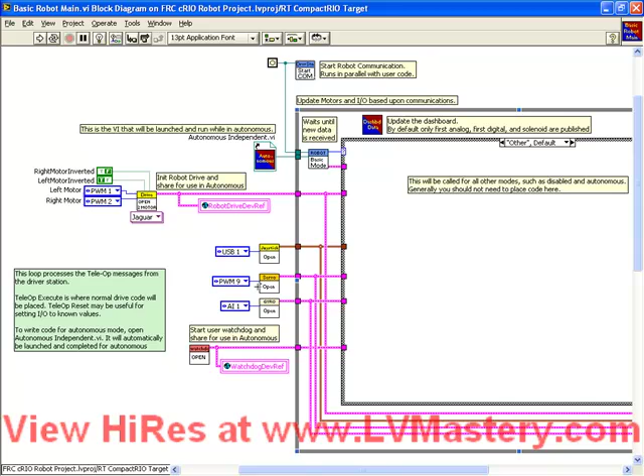You need to do that outside the while loop on the left hand side here, and then you wire into the basic robot main. We've done that here with both the servo and the gyro. And if we follow these wires around, we've also made copies of the servo close and gyro close, and we've wired those reference wires into them.

So when we take a look at the teleop execute case, we see that we've got the gyro get angle, and if we turn on our context help, we see that that returns either the angle or the angular rate from the gyro. And we've got the servo set angle, which is going to allow us to change the angle of a particular servo motor.

So this functionality of this code is really quite simple and frankly entirely useless, but it's good for a demonstration of how we can connect a sensor up to an output.

At any rate, we wanted to talk more in this video about the autonomous mode than the teleop. If we take a look here, we've got this block called the basic get mode, and this is a VI which is provided in the WPI library, and it's something which we should not modify at all.

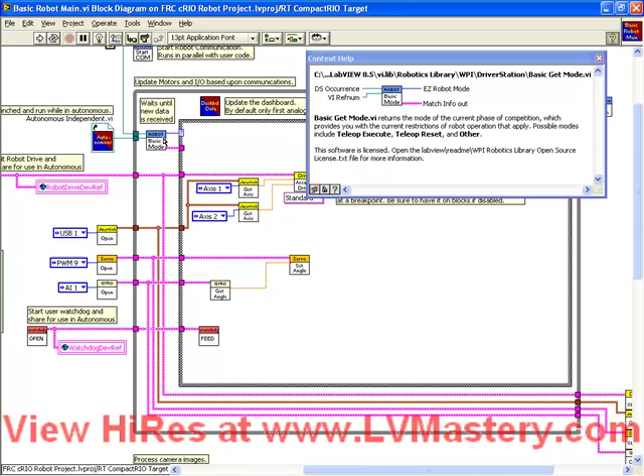Essentially what it does is it communicates with the driver station and finds out what mode the robot's in, and it spits out a value which is then used by this case structure to decide how the basic robot main should function.

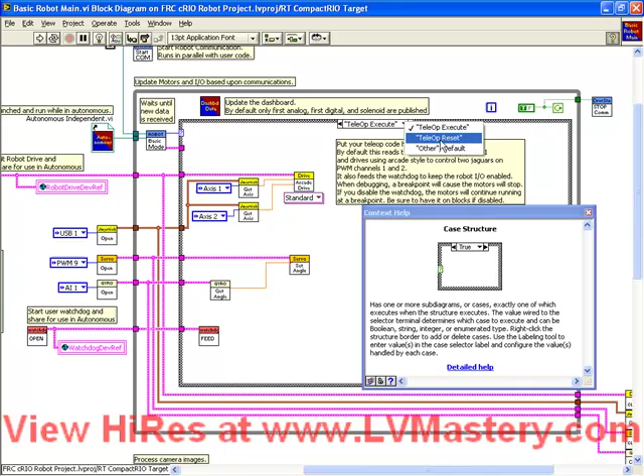So if we pull down the selector of this case structure, we see that we've got the teleop execute case, we've got teleop reset, and the code sitting here will be executed whenever the teleop mode is reset. And we've got other.

So other here is a completely blank case. As it says here, this will be called for all other modes, such as disabled or autonomous. Generally, you should not need to place any code here. So here we've got a blank case for autonomous mode, and the instructions tell us not to put any code here. So it leads to the natural question of, well, how do I write my autonomous code?

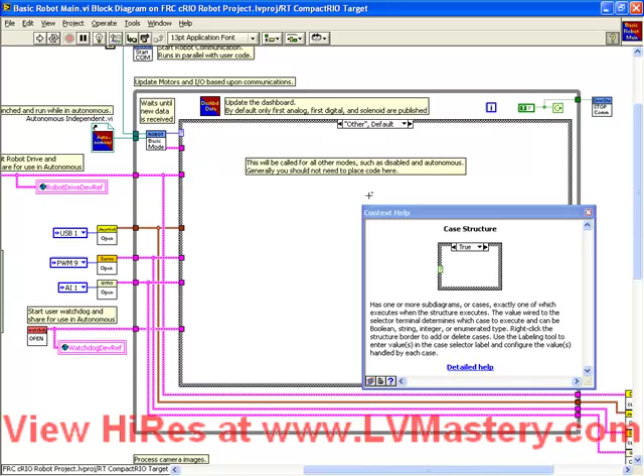Where does it go? The answer to that is actually sitting here. This is a reference to a VI called Autonomous Independent. So what does that mean, that it is a reference? It's not the VI itself.

Remember what we learned about the data flow methodology within LabVIEW. If this was a VI sitting here, it has an output wire connecting to the input of this while loop. In other words, this while loop wouldn't run until this Autonomous Independent VI finished, and that obviously doesn't make any sense for our application. So it is a VI reference.

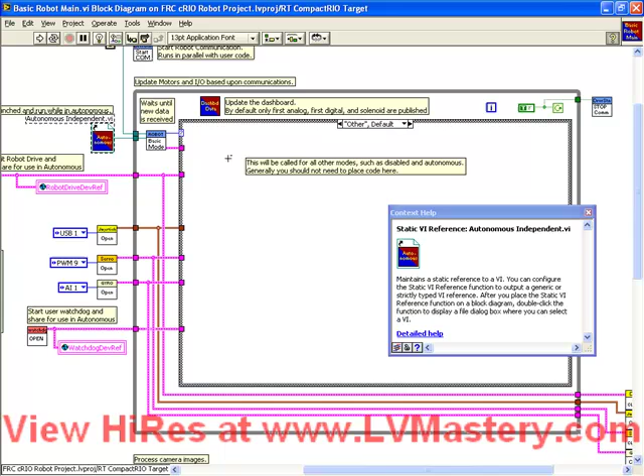In other words, it is a way to tell the framework of the code where our Autonomous Independent VI is. And what happens is, behind the scenes, the framework is taking care of launching and shutting down our autonomous code. That's why it's not sitting here. It's not sitting in the teleop.

Actually, if you look very carefully down into it, and we won't go through that at this stage, I think it's beyond the scope of this video, you're going to find where it automatically launches and automatically shuts down that Autonomous Independent VI.

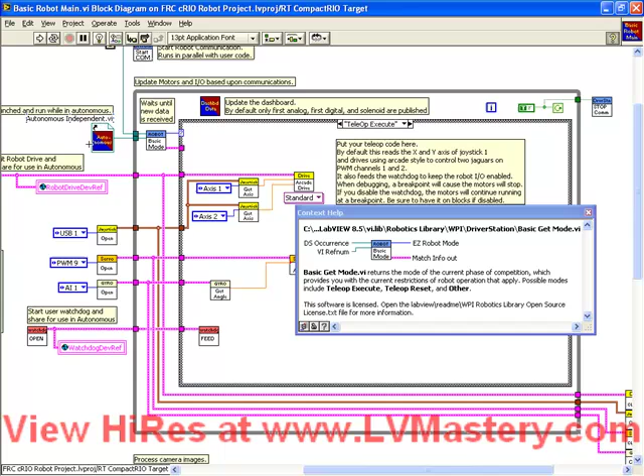It is enough for us to know at this stage that if we want an autonomous mode, we've got to put our code into this Autonomous Independent VI. We don't have to worry about when it gets launched and when it gets shut down.

So how do we get at this VI? This isn't the VI, it's just a reference. Well, it turns out because it is a reference, if we double click on it, it will open the Autonomous Independent VI. Alternately, if we were to go to our project window, we would see sitting here in the root of our project is the Autonomous Independent VI.

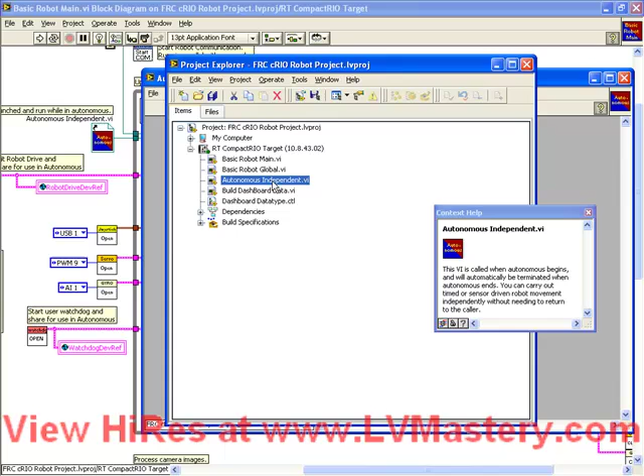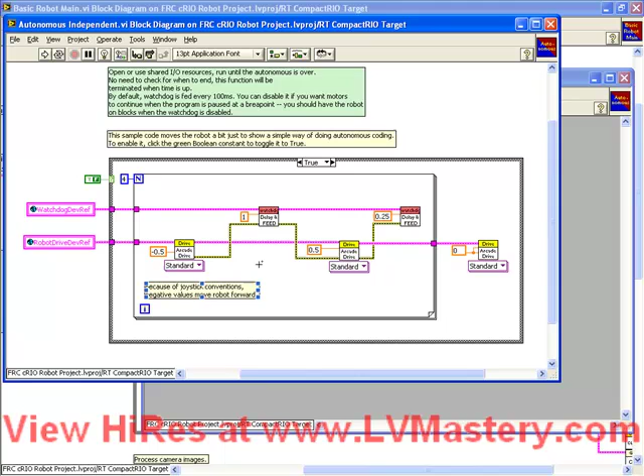And then it repeats that 4 times inside a while loop. So if we activate this autonomous mode, our robot is going to move in one direction at half speed for 1 second, in the opposite direction at half speed for a quarter second, and then it's going to repeat that a total of 4 times. And at the end, it's going to set the speed to 0.

So if you want to try this out, all you need to do is flick this Boolean constant to be true, and then when you run your robot next time and flick it into autonomous mode, it's going to drive. So be very careful before you do that.

Before you click run, make sure that the robot is up on blocks, or it's not going to run into a wall or do anything crazy. Don't let your mechanical team find out that the programming team broke it running some sample code. That'd be really quite silly.

So what I want to talk about now is how we can make modifications to this to suit our own purposes. Obviously, this autonomous code is not going to work to allow us to win any points in competition. So we're going to need to change this code to do what we need it to.

In this example, we're going to take the servo motor, which we've activated in our basic robot main VI. We want to control it in autonomous mode. I think what we'll do is turn it to one extreme, let it sit there for 5 seconds, then turn to the other extreme and sit there for 5 seconds, and just repeat that continuously.

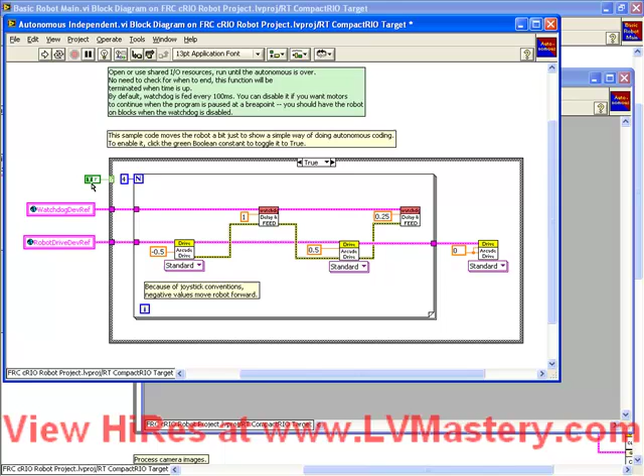So let's take a second now and look at what we need to do to achieve that. Let's go back to our robot main VI. We have a servo set angle VI, which makes it very easy, and if we activate our context help, we see all that we have to wire into that is a number which represents the angle in degrees. So we know how to do this.

We can put in a servo command, which is going to send it to one extreme. Then we can use a delay block, and then we can put it to the other extreme. But before we can do that, we have to notice that when we wire up the servo set angle, we need not only to set its angle, but we need to tell it which servo we care about. We need to do that by wiring up a servo ref.

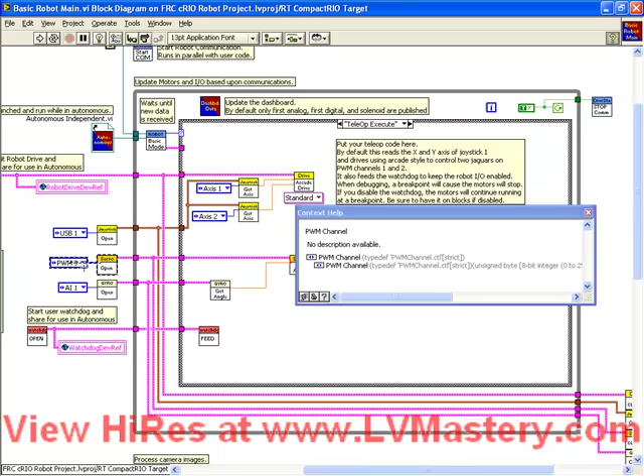So here in our basic robot main VI, we opened up a servo. We opened up the one attached to PWM9. So what we need to do to be able to talk to that servo in autonomous mode is to be able to access that reference. And when I talk about that reference, I'm referring to this wire.

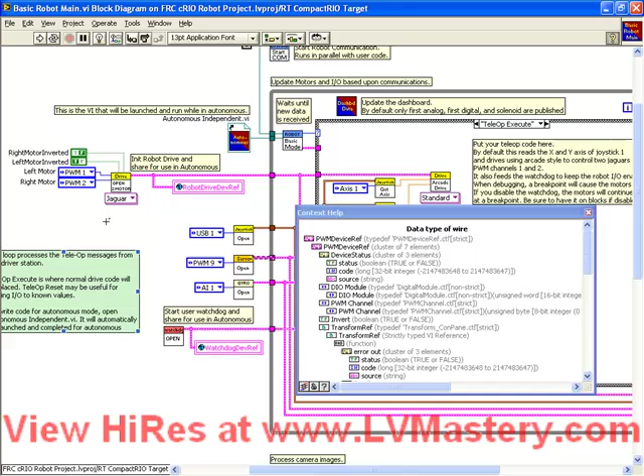So before we get to the answer on how to do that, let's just take a quick look a little further to the left, because we noticed that that autonomous mode was talking to our motor drives. Let's just return to that to take a look at it. We see here we are talking to the robot drive.

And where is that wire actually coming from? Well, we have this guy here. This is actually a global variable. And what global variables do is they allow you to make data available anywhere in your LabVIEW program. Naturally, this is how we're going to make the servo reference available.

So we see we have 2 global variables here, one for the Watchdog and one for the robot drive. And we can see in both of these cases, these global variables are acting as outputs. In other words, the data is coming out of those global variables and then being used by our autonomous VI.

If we return to the basic robot main, we see here that the reference that we opened to our 2 motors is being fed into the main while loop and being used by our teleop mode, but it's also being fed into this copy of our global variable. And the same is true for the Watchdog. We open up a Watchdog reference here, and we put that reference into the global variable.

So what we need to do in order to make our servo available in our autonomous mode is to create a global variable for it. And there's a couple different ways to access our global variable to add things to it. The simplest is just to double-click on this global variable. And you see what happens, if I hide the context help, is that this basic Robot Global.vi is opened.

If we go to the window and try and show block diagram, we'll see there is no block diagram. A global variable is essentially a VI which allows you to store data, but it does not have any code whatsoever. It's merely a repository for data.